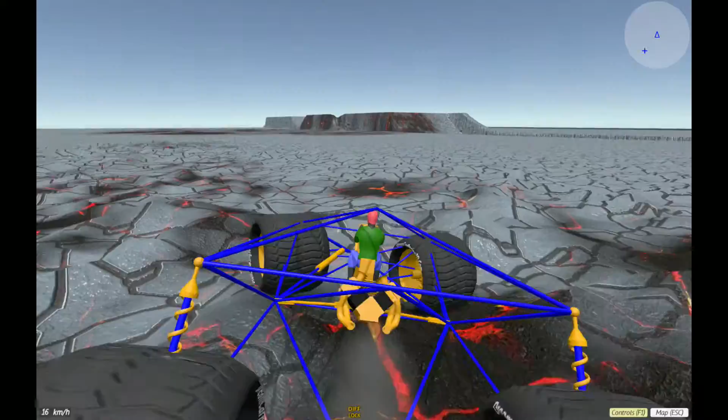So as you can see, we have some pretty nice off-roading shocks loaded up. The rear ones are less hard than the front ones. The damping is set to the maximum. They've got a whole bunch of compression and stretch, and everything is looking dandy. So let's go ahead, take this off onto the road, and we can see that this handles even some of the more gnarly bumps really well, and I still have phenomenal control over my car.

So let's go ahead and get to the other side there. Let's go ahead and just spawn over there. That'd be a lot easier. So we take it over some of these ridiculously large speed bumps, and we barely even notice that they exist. In fact, if we go ahead and take it over to those short speed bumps, we won't even notice them at all.

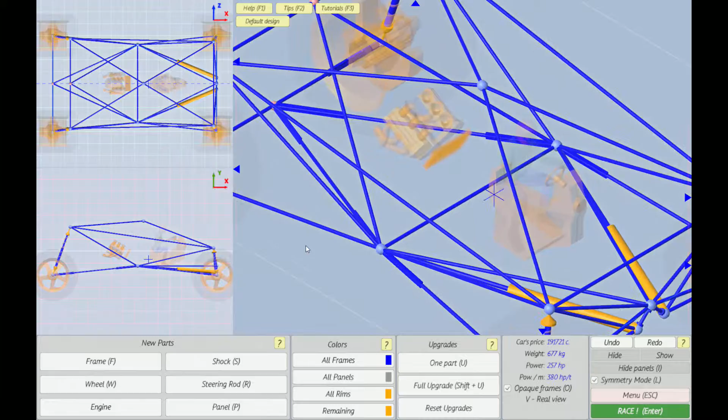So you might be wondering, how do I make shocks that good? And that's really simple. The first thing that you need to look at when making shocks is what shocks are. When you're looking at a shock in Dream Car Racing 3D, you will see the coil on the outside. I have to switch to the real view to show you this. It's that little gold thread spinning around the damper in the center there. And that is represented by the hardness. And as you already heard me say, that is the damper.

So, what does the hardness do? The hardness, or the coil, stores energy. Think of it this way. If you squish a spring really tight between your fingers and then let go really quickly, that spring is going to go flying up in the air. That is because all of the energy that you put into squishing that spring really small never went away. That energy was never absorbed by anything.

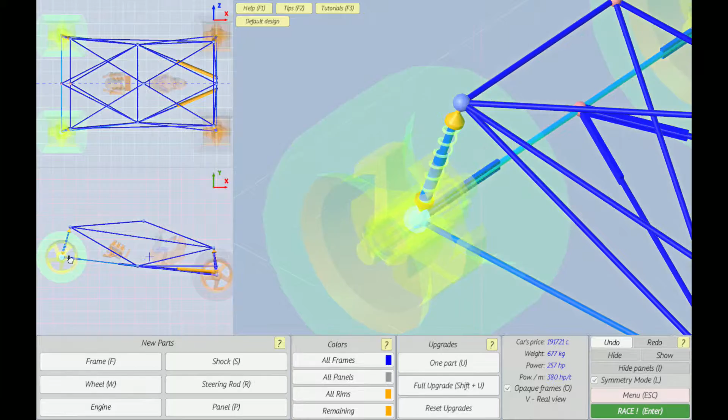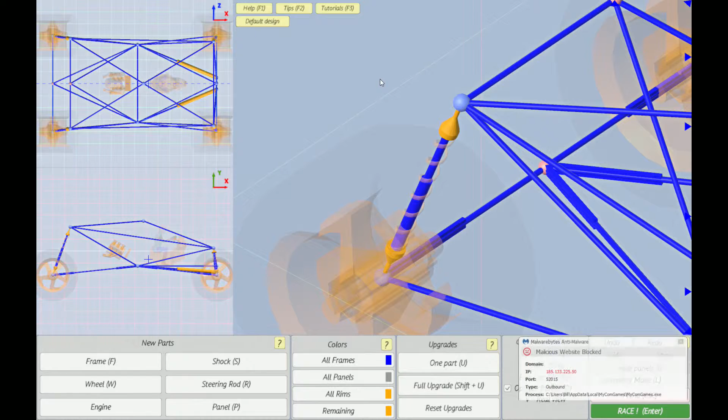So you can have the hardness set to the maximum power, and it really doesn't make your shocks good at all. What the damping does is it serves to release that energy that's stored. So while the shock is getting bigger or smaller like this, that damper is resisting the movement. And for off-roading cars, setting the damping to the max is great. On closed circuit cars, it's not that great. You want a lower damping because it slows down how quickly your shocks can move, so the compensation that the hardness of the coil can give when going over speed bumps is slightly diminished.

So you might be thinking, well, I'm not really interested in making an off-roading car or circuit car. Are there any more things that I need to look at when making a shock? Yes, of course there are. You need to very much look at the max compression and stretch. Look at these as percents. So 0.4, that would be 40%, and 1, that would be 100%. So the max compression being 40% means it can be as small as 40% of the original length. Let's pretend it's 1 meter long. That would be 0.4 meters.

So, max stretch, 100% of the original length. Again, pretending that's 1 meter, that would be 1 meter. So that means it has 0.6 meters of travel. So over that 0.6 meters, we have a hardness of 516 acting on it, and we have a damping of 100, slowing the movement of those 2 points.

Now you might see right here and you might be like, whoa, what is that? That is so much higher than the rear ones. And that's for a few reasons. One, it's a shorter shock, as you can see. It's almost half the length. Two, it has less compression and the same amount of stretch. And the last one is it's a front shock.

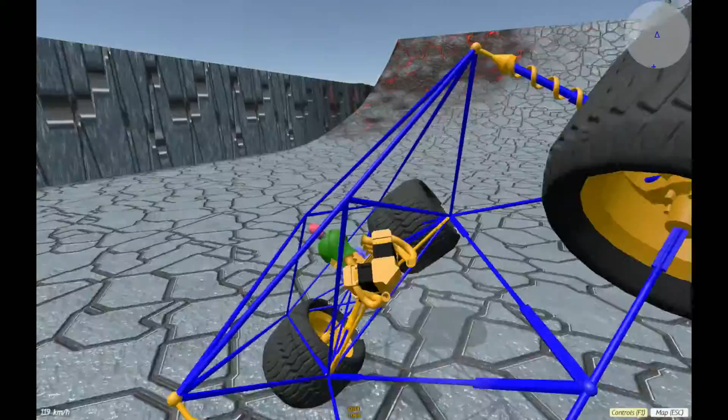This is gonna be the face of the car. This is what takes the punch when the punches are gonna be thrown. Do you want to get punched and then have your face just cave in, or do you want to get punched and then have your face stand up to the punch and be unyielding? Well, in shocks you don't want it to be unyielding, but you understand the point.

Whoa, I kind of went off the road a little bit there. Let's undo that. Whoa. Still getting used to the controls after 170 hours. Hey, so let's take that again.

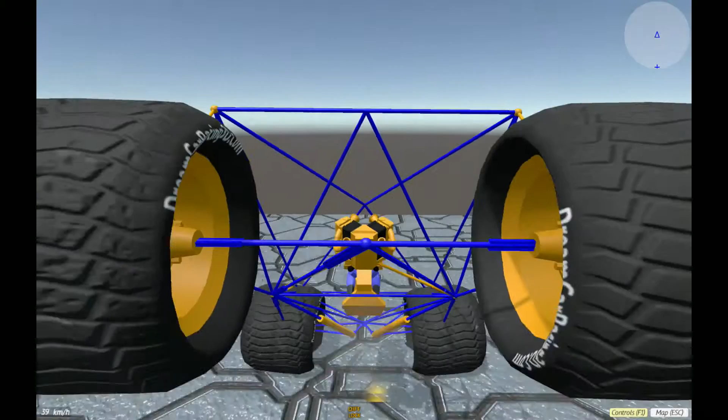So as we go up here, we go for the jump. Whee! And then we land. And boom. Those front shocks absorb the majority of the force, and those rear shocks come in and absorb the rest of the force. So the shocks did their job. They kept the wheels on the ground as much as possible. Even over the speed bumps, even over that ridiculous terrain, over everything. And that's what you want with off-roading shocks.

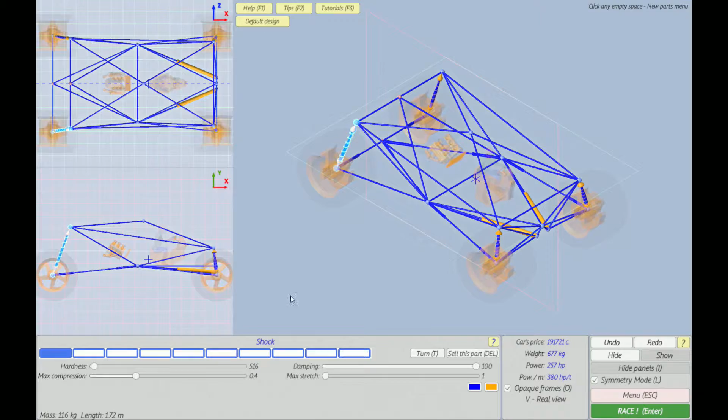In this video, we are not going to be looking at closed circuit track shocks. What you want for closed circuit track shocks is much higher hardness, lower damping, and you want everything to be nice and even. This is because tilting makes you lose energy. So as you can see, my car tilts a little bit when we turn left or right. That's bad for being on the track, and there's a whole bunch of different reasons why.

There's the racing curve, there's the differentials, like the differentials won't work quite as well for compensating, or well, they will have to compensate. And there's all this different stuff that you'd have to go over if you were making a closed circuit track car. And we're just going to ignore all of that.